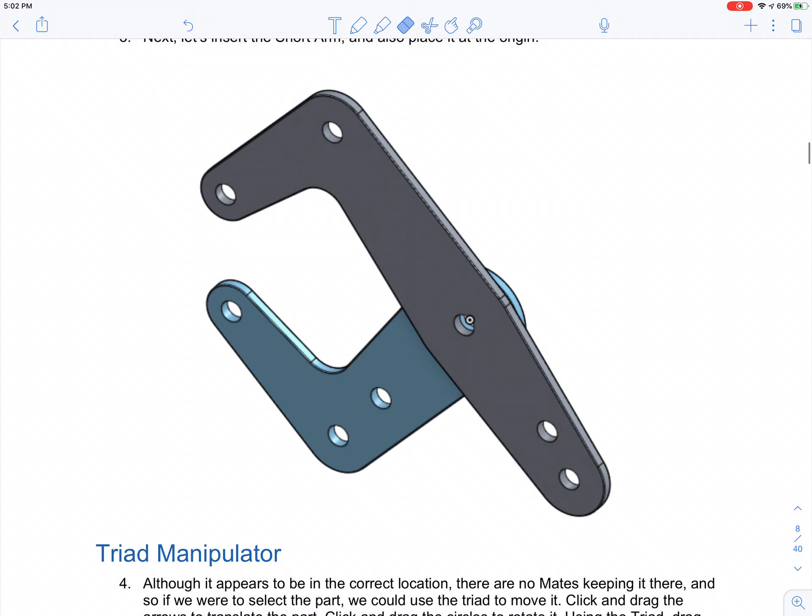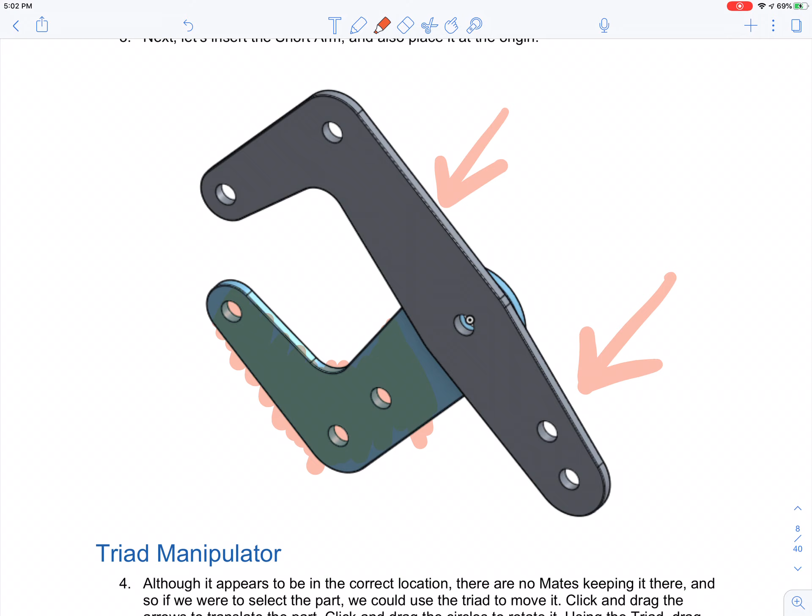If you look at this drawing, we can see that this face of the short arm facing us is being paired with the back face of the large arm that we cannot see. So when we mate the parts, we have to make sure that this is what we are doing.

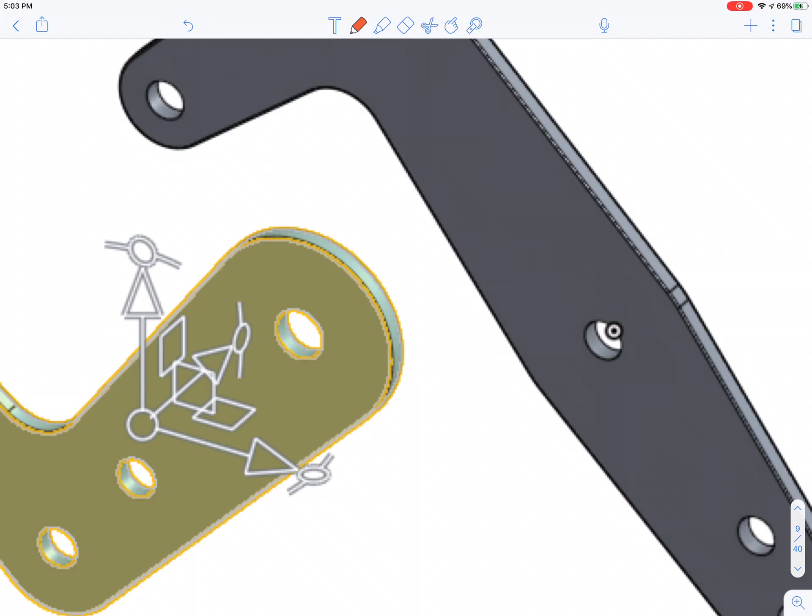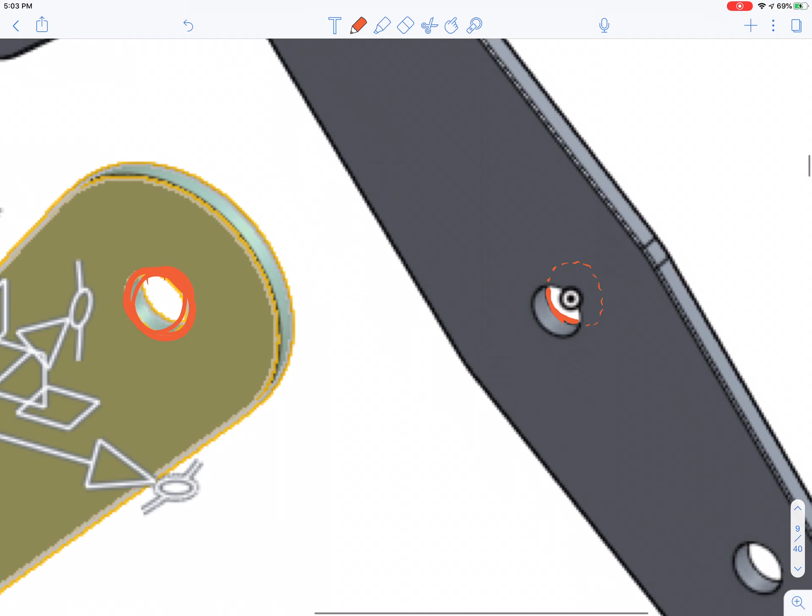You'll see this when we start pairing these. I'm going to highlight this circle right here, click the pair action, and pair it with this circle that I can't see back here. I can flip my drawing so I can actually see it and click on it, or you can click it from this side as well.

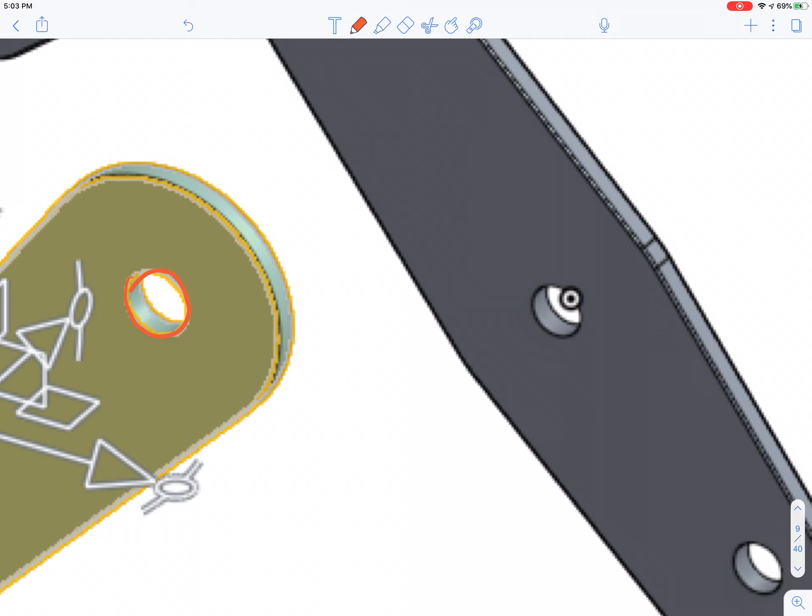If I pair this circle with this part, what's going to happen is both of my arms are going to overlap. The drawing's not going to come out well, they're not going to come out as solid pieces.

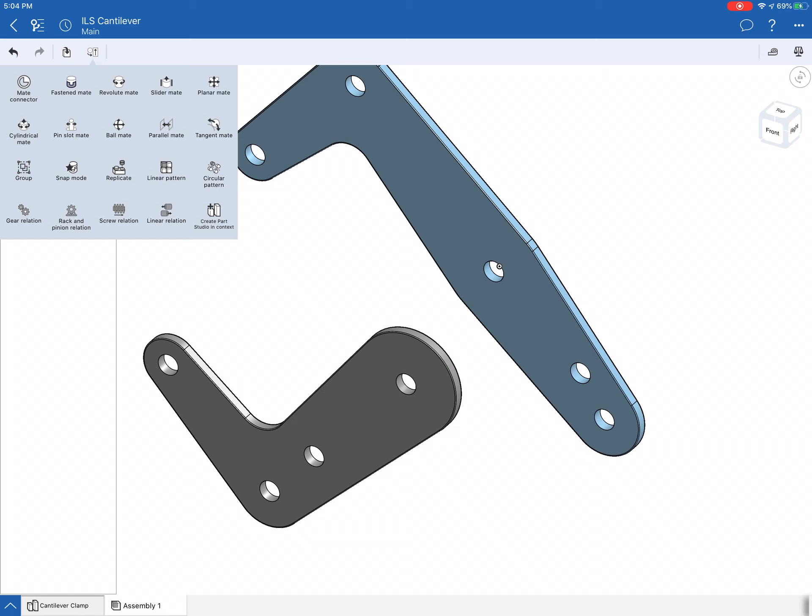Now that I have my short arm here, I'm going to click my menu, which is right next to Insert, and click Revolute Mate. Revolute Mate, because that's going to allow it to move around in circles.

Now we can do this in a couple of quick steps on the iPad. For a laptop or desktop, just follow the steps in the instructions. Now, for the short arm, I want to pair the side that's facing me, which is the side that's away from me on the large arm.

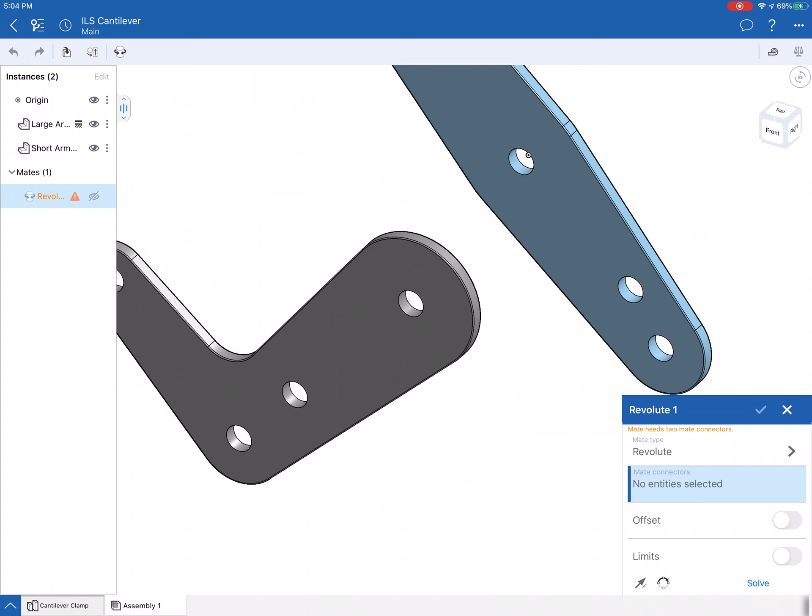I'm going to click on this circle, this opening, with this opening right here. I'm going to click that part of this circle, and you see that crosshairs appears in the middle. I'm going to click that as well. That's the first step of the mating process.

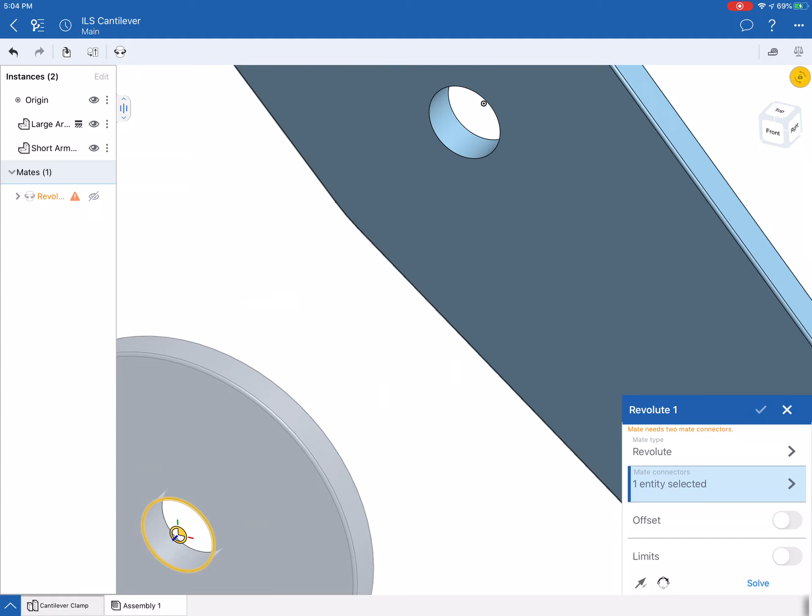Now I'm going to go to this arm right here. If I were to click this by mistake, the pairing wouldn't work, because the arms are going to intersect, and I don't want the arms intersecting, so I'm going to undo that.

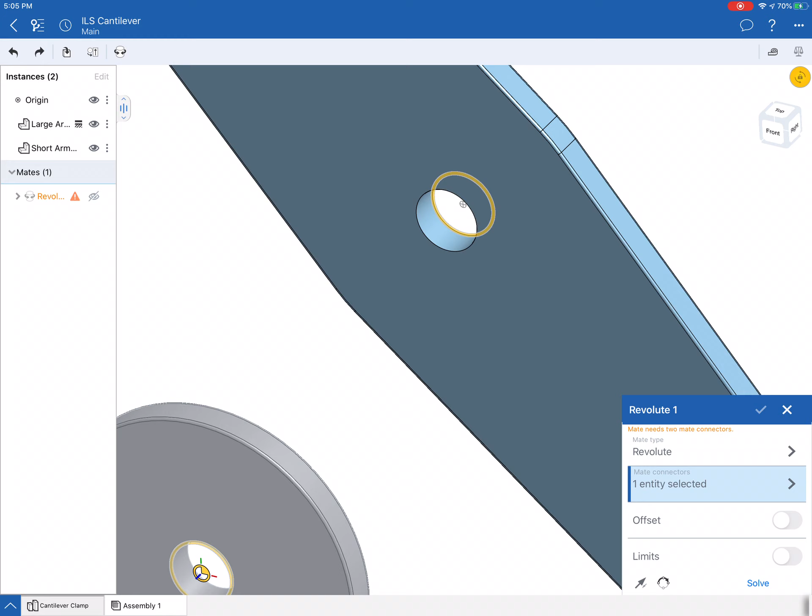What I want is for the arms to be right on top of each other. So I'm going to click that circle that's back there. As you can see, it's on the back side. I can't turn the drawing right now because I'm in the process of adding an action, I'll do that after I finish the mating process.

So once I click the circle, I'm going to click on the crosshairs, and my arms are going to be mated once I click OK. And you see they're on top of each other, they do not intersect, which is what I want.

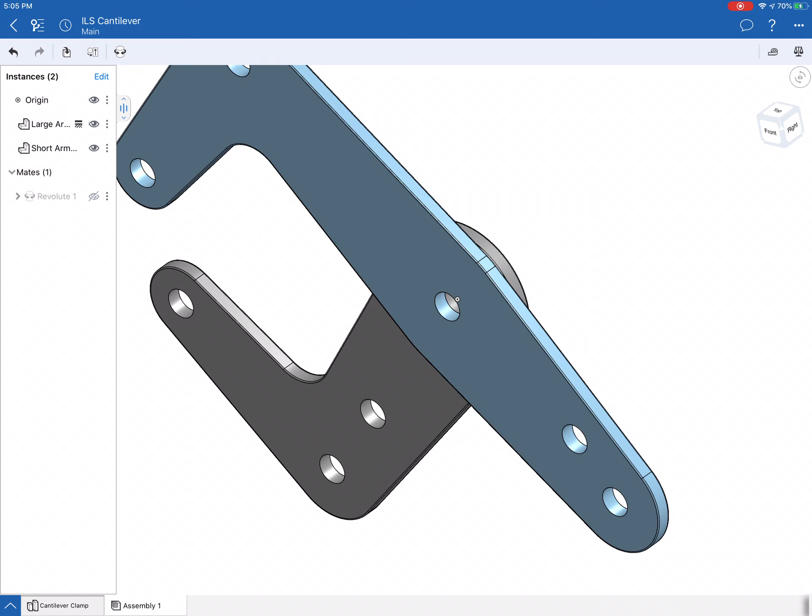Now, one more thing before we finish this. I'm going to open this by clicking Edit. Before you press check, you can see how the arms interact with each other.

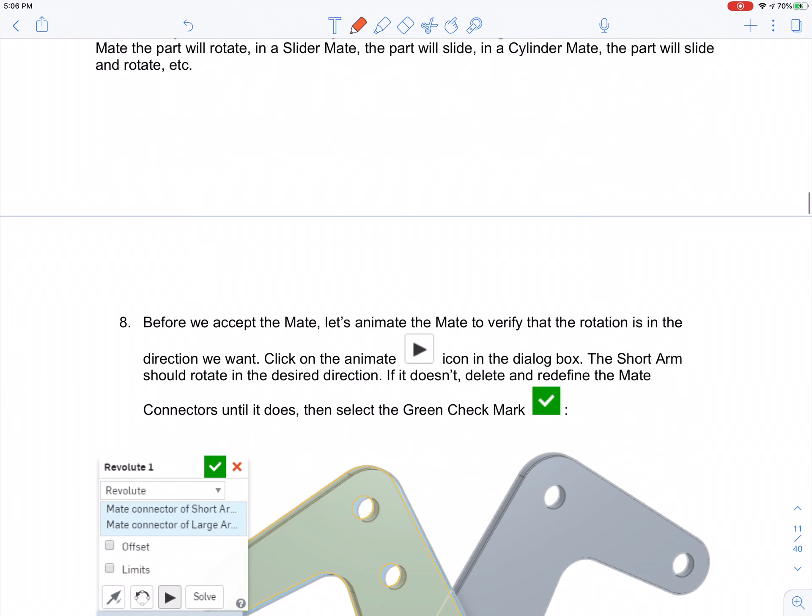If you are on a laptop, once you mate them, you'll have an option here that's a play button, which is this one right here. When you press it, it'll show you the motion of the small arm relative to the large arm.

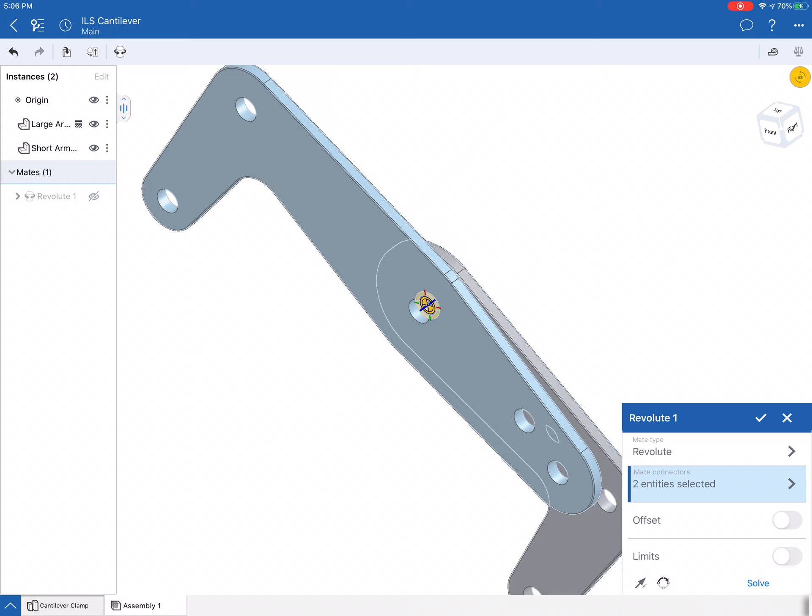In our case, on the iPad, we don't have that button present, but you see this arrow at the bottom right and this circle with an arrow in it. The circle with an arrow is telling you the motion of the arm, guiding you through its motion. If you click it, every time you click it, it moves 90 degrees, showing you the actual possible motions of it. And that's it.